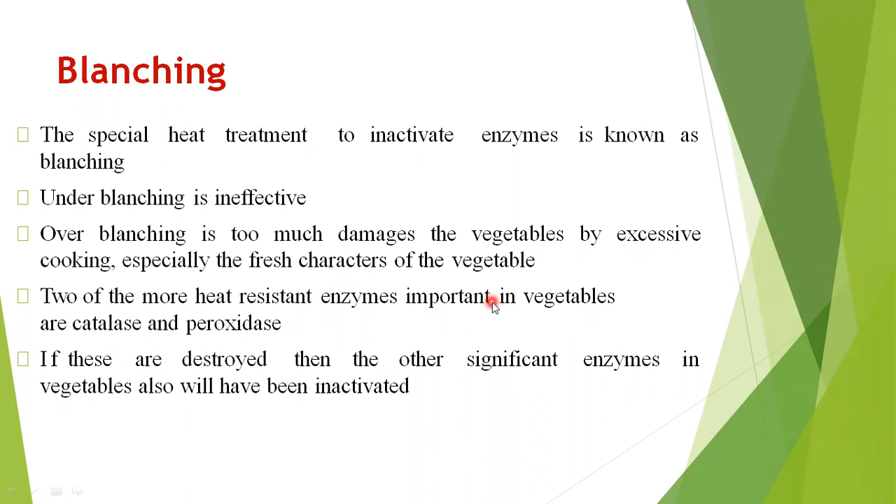Vegetables differ in size, shape, heat conductivity and natural levels of their enzymes. Blanching time and temperature have to be established on an experimental basis, as it varies as per the commodity variety and their tolerance of heating.

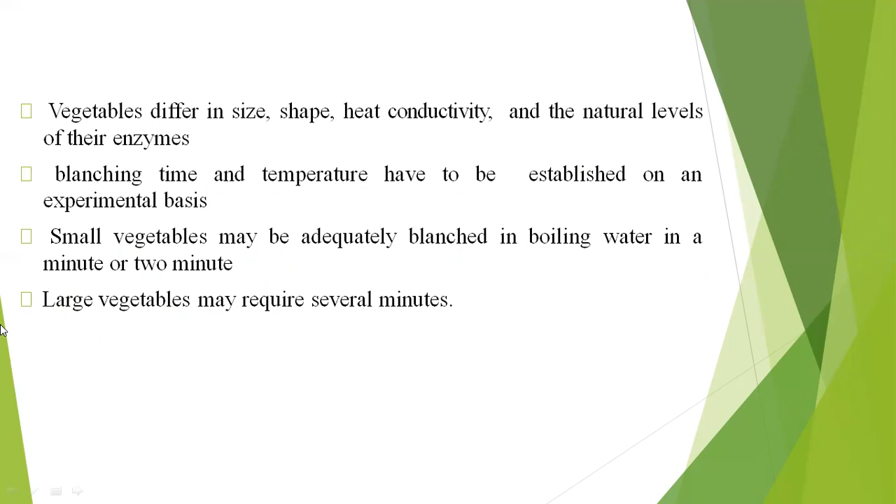Some vegetables may be adequately blanched in boiling water in a minute or 2 minutes. Small vegetables may be adequately blanched in boiling water for a minute or 2 minutes, and larger vegetables may require some more time than the smaller ones.

Blanching is often used as a pre-treatment, prior to freezing, canning or dehydration. The cooling of vegetables after blanching is performed in order to avoid excessive softening of the tissues, due to the medium used, that is hot water or steam.

Due to that, excessive cooking may occur and excess softening of the tissues may happen. So to avoid this, we use cooling of the vegetables after blanching, which has to follow immediately after the operation.

One exception is the case of vegetables for drying, which can be transferred directly to drying equipment without cooling. Cooling in water can be achieved either by immersion or by spray.

Vegetables have to reach a temperature under 37 degrees Celsius as soon as possible. Too long a cooling time generates supplementary losses of valuables like water soluble vitamins. To avoid this, the temperature of the cooling water has to be kept as low as possible.

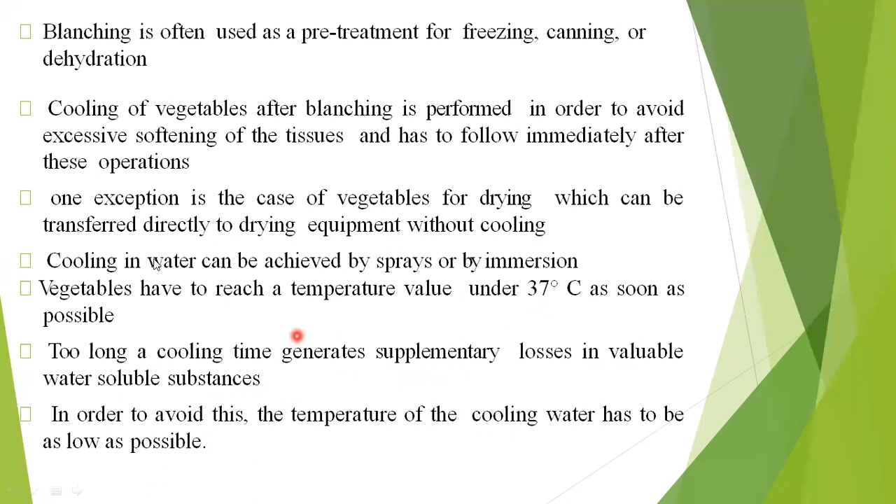Now, what are the reasons behind the blanching process? It slows or stops enzymatic actions, preserving the flavor, color and texture. It also cleans the surface of the commodities from dirt, bacteria, molds and other growth of microorganisms.

It also gives brightening to the color of the commodity, retards the loss of vitamins, and softens the vegetables, making them easier for packaging. So these are certain reasons behind blanching.

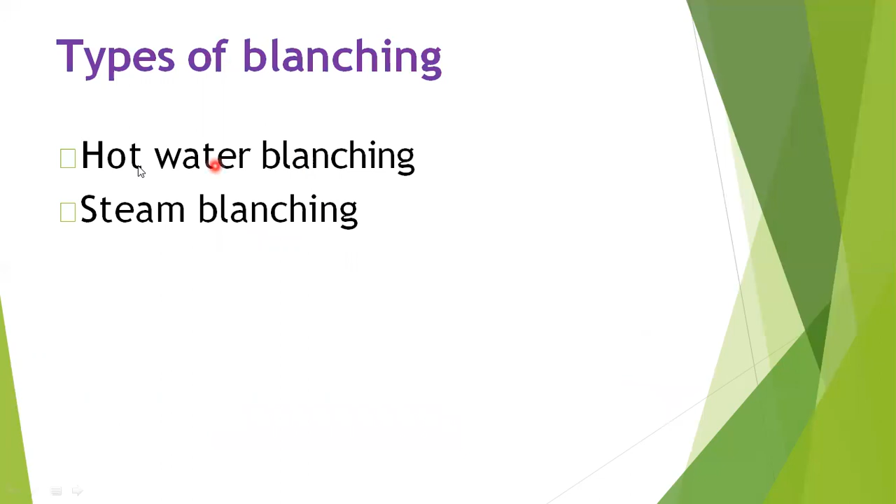Now we will come to the types of blanching. There are basically two types: hot water blanching and steam blanching. So one by one we will see these methods in detail, starting with hot water blanching.

In this method, there are a number of designs of blanchers, each of which retains the food in hot water at about 70 to 100 degrees Celsius for a specific time, then removes it to a dewatering or cooling section. The blancher cooler has three sections: the heating or preheating stage, the blanching stage, and the cooling stage.

Here the food is preheated with water circulated through a heat exchanger. After blanching, a second recirculation system cools the food. The two systems pass water through the heat exchanger, which heats the preheat water and simultaneously cools the cooling water.

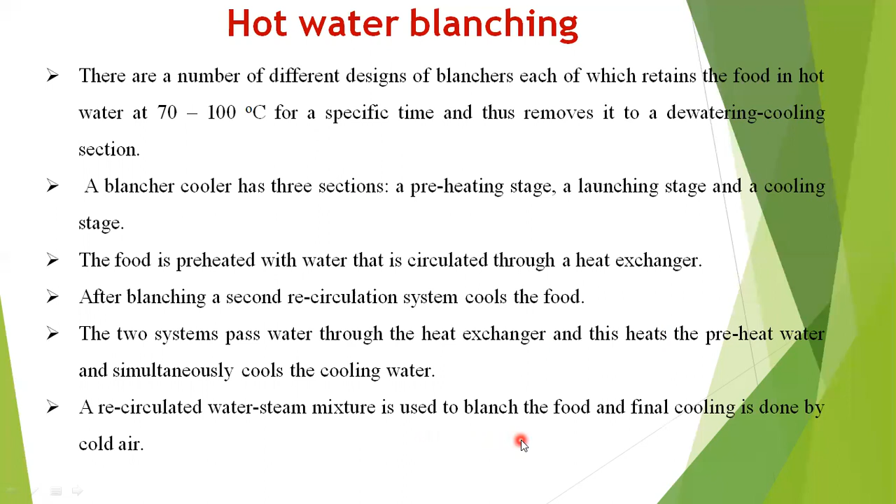A recirculated water-steam mixture is used to blanch the food, and final cooling is done by cold air. Hot water blancher is again classified into reel blancher and pipe blancher.

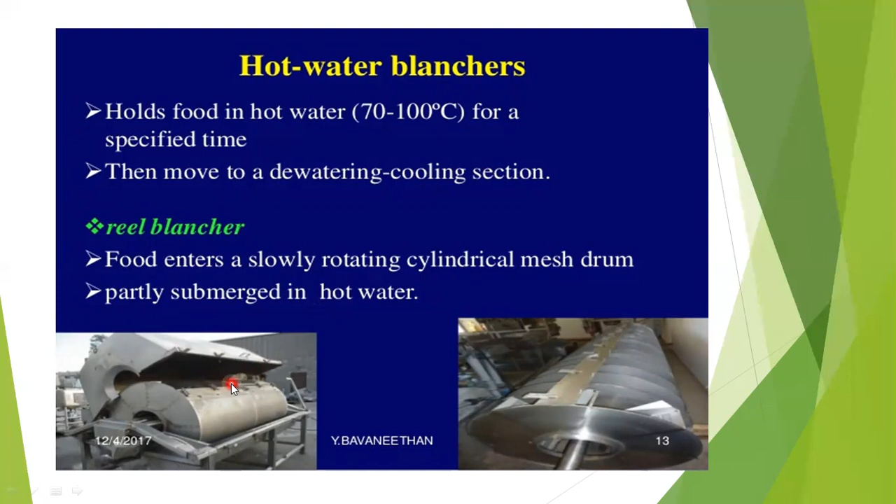Now what is a reel blancher? Here, this is the picture for the reel blancher. Both pictures shown indicate the reel blancher. Food enters a slowly rotating cylindrical mesh drum, and this food is partly submerged in the hot water. So all the process of blanching may be carried out in this cylindrical mesh drum.

The advantage is that it occupies less floor space, because the dimensions are very small. So this pipe blancher occupies less space.

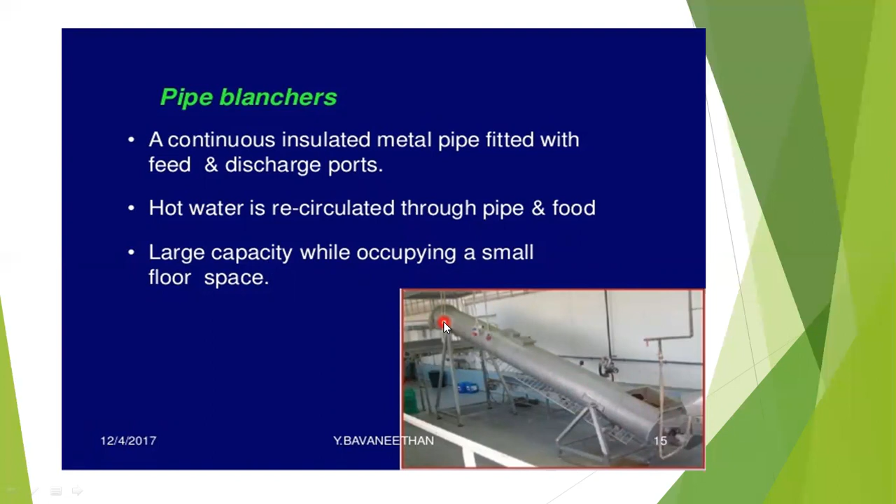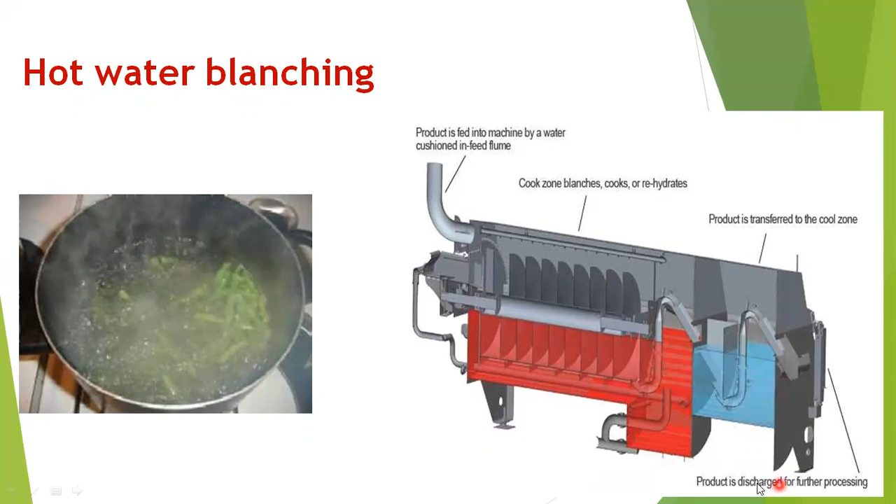Here the hot water blancher is shown again. The product is fed into the machine by a water cushioned in-feed flume. See there, the product is fed in from this point, and this is the cooking section. It cooks and rehydrates, and then the product is passed to the third section, that is the cooling section or cool zone, and after cooling it can be discharged for further processing. It may be freezing or another one. So blanching is done prior to other processes like freezing or canning.

So we will move towards the next method, that is the steam blancher. In this method, steam is used as the medium for blanching the commodities. It consists of a mesh conveyor belt which carries your food material through the steam atmosphere. The residence time of the food is controlled by the speed of that conveyor. How long your food material is exposed to the steam depends upon the speed of the mesh conveyor.

In conventional steam blanching, there is often poor uniformity of heating in the multiple layers of the food. So over this conventional method, another method was introduced, called individual quick blanching, which involves blanching in two stages. In the first stage, food is heated in a single layer at a high temperature, and in the second stage a deep bed of food is formed and held for sufficient time to allow the temperature at the center of each piece to increase to that needed for enzyme inactivation.

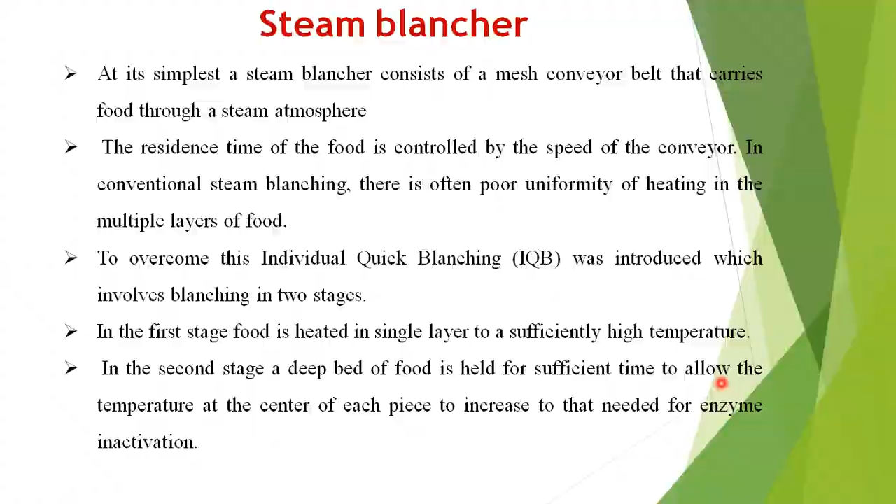Most of the enzymes get inactivated at more than 50 degrees Celsius. So when the desired temperature of enzyme inactivation is reached, you can remove that food material and forward it for the next operation. So this is regarding the steam blancher. This instrument shown is the steam blancher, and here again the flow diagram of the steam blancher is given.

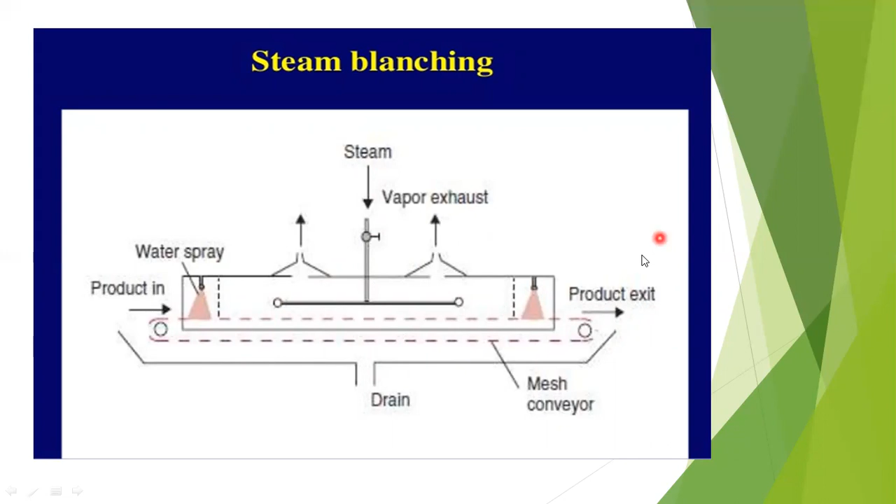The product enters through this mesh conveyor, and the steam nozzles are shown here. Simultaneously, water spraying is also there for cooling your commodity after blanching, and the product passes through the discharge outlet. Drain water is collected at the bottom side and recirculated for cooling your commodity. A supply of steam is there. So this is the diagram of steam blanching.

Now certain blanching parameters for vegetables are shown here, meaning what temperature and time blanching should be given to each vegetable. For peas, you can keep the temperature at 85 to 90 degrees Celsius for 2 to 7 minutes. Green beans at 90 to 95 degrees Celsius for 2 to 5 minutes. Cauliflower at boiling temperature, 100 degrees Celsius, for 2 minutes. Carrots and peppers at 90 degrees Celsius, and their time may vary from 3 to 5 minutes, or you can keep it at 3 minutes. So these are the temperature and time combinations for certain vegetables.

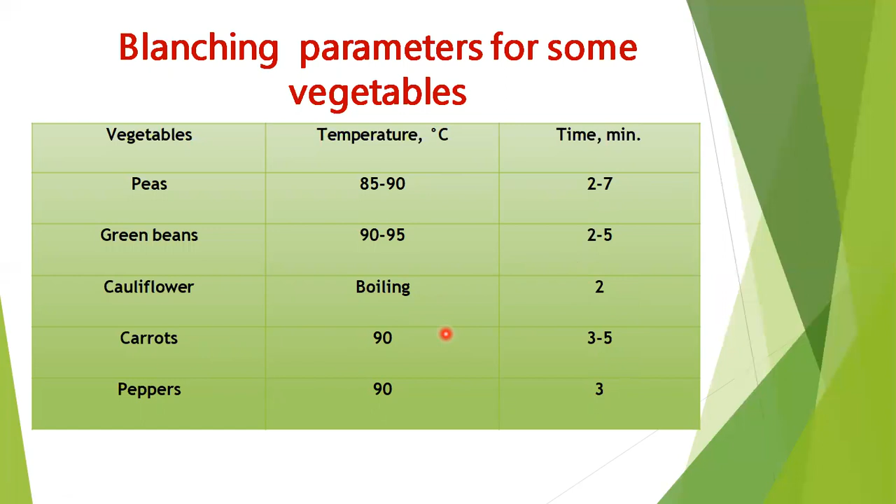Next we will see the effects of blanching on food, which nutrients or food parameters get affected. First of all, nutrients. Some minerals and water soluble vitamins get lost during blanching, mostly by oxidation, thermal destruction, and leaching. The next component is color and flavor. Blanching brightens the color of the food by removal of air and dust from the surface.

Sodium carbonate is added to protect the chlorophyll content and retain the color of green vegetables. Enzymatic browning of cut apple is prevented by holding the food in dilute brine solutions prior to blanching. So browning may not occur if you keep your apple in the dilute brine solution before blanching.

The next one is texture. How does texture get affected by blanching? Blanching is most of the time used for softening vegetables prior to packaging, or to reduce their size and shape. Calcium chloride, approximately 1 to 2%, is added to the blancher to maintain the firmness of the tissues. So packaging can be done conveniently.